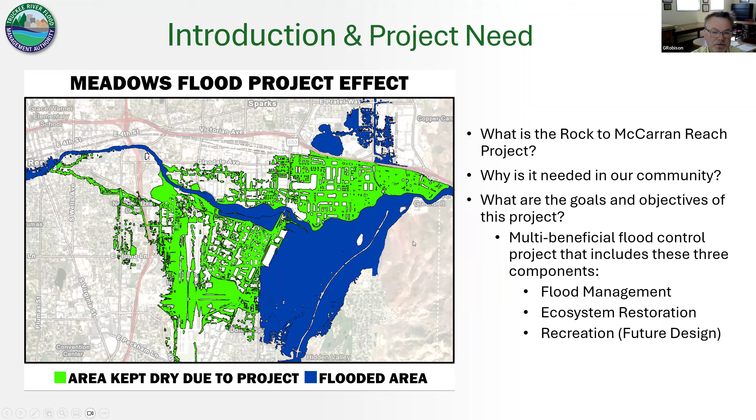Next slide, please. And I would probably hand this off to Shane at this point. So Shane, if you want to kind of go through this.

And then you can hand off to Wood Rogers for what we're going to do at the meeting. This isn't the actual talk, I'm just trying to bring it in because you guys know a lot of the information already, so I don't want to bore you to death. And for the working group, I'll just go through some of the background.

They haven't been involved with it, so I'll just say that we did an alternatives analysis in 2024. There were 8 alternatives studied in depth, and a preferred alternative was selected with proposed modifications to that preferred alternative. And then we were directed to proceed with the 30% design hydraulically on that.

And then we did have a working group meeting on 5/28 where we showed that preferred alternative, and I'm going to show that to you on these next slides just to get everybody on the same page.

And then we've also been preparing separately 2 concepts for this recreation, and we're going to share those concepts as well today.

So for the working group, most of them, if they went to the first one, will have seen this, but I'll just pull this up and say, here's really the preferred alternative for the hydraulics.

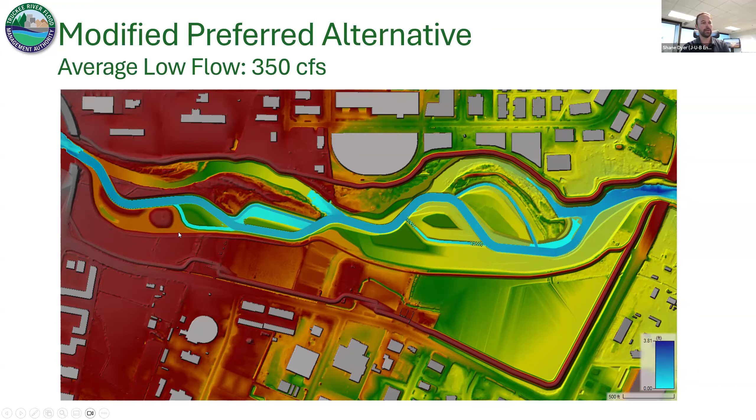And this is what the average low flow looks like for the 350 CFS. And we went into detail on this at our last working group meeting with all the different features, we really went through the design and all the features in here, and show this for the 5-year event, what it looks like. And then essentially for the 100-year event, what it looks like.

And then go into the recreation discussion overview. We're going to talk about some of the existing conditions, the criteria, and then the 2 concepts that we have, which are a nature park and then a nature park with a recreation complex.

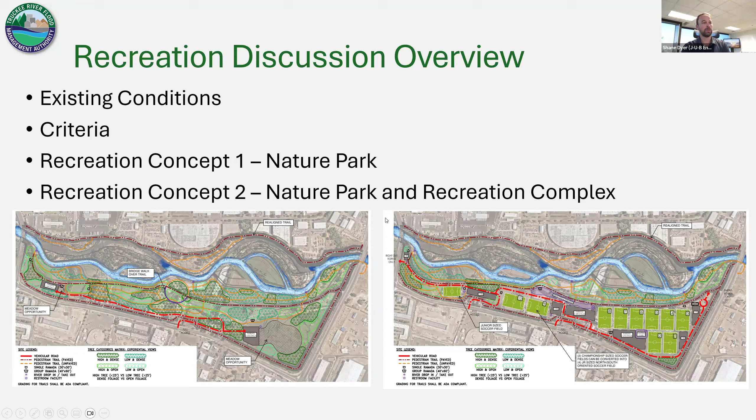So this is where I would turn it over to David. Yes, Shane, good morning. Morning. Good morning, everyone. My name is David Hewitt.

I'm a landscape architect with Wood Rogers here working on the project. The first thing that we wanted to do once we got the handoff from Shane after his introduction was to just talk about the existing conditions, tying in the colored red numbers to the location on the map here, just to kind of set the table for the conversation. Would you mind going to the next slide, please?

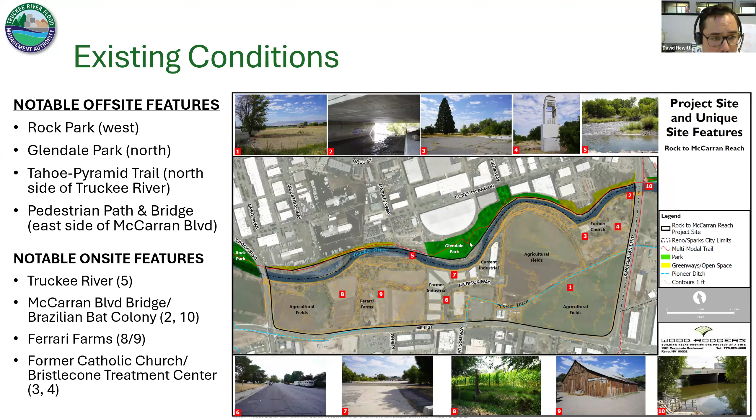This is a new slide that Eric, my planning cohort, put together to help people wrap their minds around the size of this park.

The project size for the Rock to McCarran Park project is 168 acres. For comparison, Oxbow Park is approximately 25 acres, Idlewild 50, Wingfield Bicentennial Park 9 acres. All of these other river-attached parks total approximately 157 acres. So even combining all existing recreational facilities along the Truckee River, it still doesn't match the immense project size of the Rock to McCarran project.

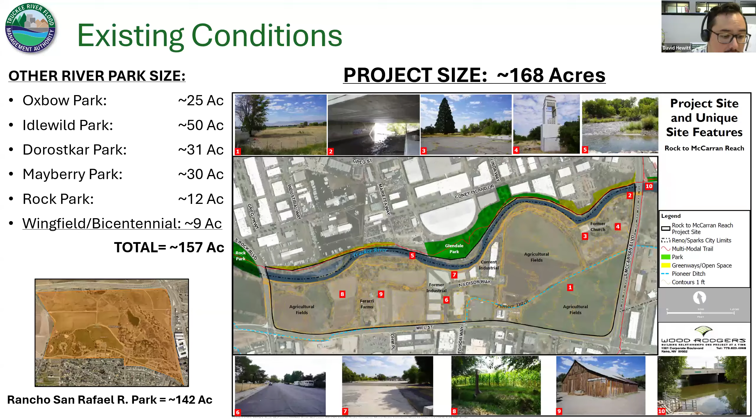Next slide, please. I feel so commanding when I say that.

Jumping into this next slide, we wanted to showcase the non-compatible amenities. As most of us know, the recreational part of the Rock to McCarran Park project is going to flood at some point. At the 100-year storm, the entirety of the park, all the way down to the roadway, is going to be flooded. So there are some clearly non-compatible amenities we don't want to put into this flood zone, like the sand volleyball pit.

Anything where a critical component of an amenity could potentially be washed away, we don't want to have there. That includes playground structures that require engineered wood fiber. That's an image of Idlewild Park there, which is on a rubberized surface.

These items will likely not be floodable, for lack of a better term. They could be inundated, could potentially have standing water, but there's going to be a myriad of maintenance concerns that spin off of a flood event. Hard courts like pickleball, and areas like skate parks that have a high installation cost but could be damaged during a storm event, we also want to stay away from.

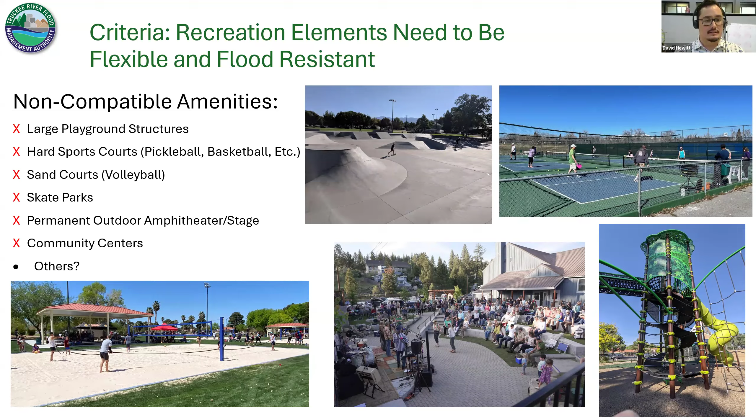Thank you. Jumping into our first concept here, we are titling this Nature Park because the goal is to create a recreational amenity that will service the community of Reno, Sparks, Washoe County, and the entire region of Northern Nevada, but to have as light a touch as possible. The main focus on the Nature Park concept will be an expansion of trails throughout here.

Around the middle point of the site, going from east to west, there is a burgundy-colored paved pedestrian trail along the top of an intermediary berm. Everything north of the berm in both concepts is staying pretty much the same. The braided river, the braiding of the Truckee River throughout here to increase flood zone capacity, is the critical component of the park. It's the entire reason why this whole project exists. That will not be changing in either concept 1 or concept 2.

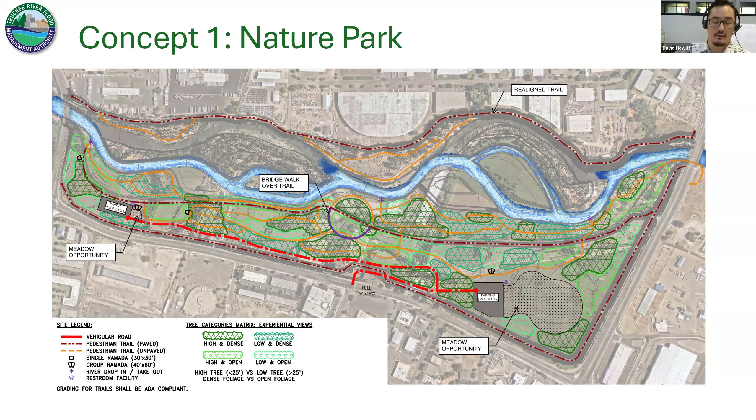Everything south of the berm is what we want to focus on here. As you can see, the primary amenities are expanded nature trails, meadow opportunities, and a bridge walk over the trail. If we jump to the next slide, it'll give us some concept imagery to help fill this out.

The purple half circle in the middle of the site is conceptualized as a bridge walk from the intermediate berm, connecting itself to the berm from there. What that does is it raises people and visitors above into the tree line so that they're above the paths below them.

We would also like to think about adding sheltered bird blinds onto this bridge walk, essentially a boardwalk connecting two parts of the intermediate berm, but bringing in sheltered bird blinds so that as you're among the trees, you can be hidden and observe the natural processes of the wildlife in the ecosystem here.

The grass and meadow plantings, those meadow opportunities, are areas set aside where we have some different ideas of what we could potentially put in there. One idea would be pollinator gardens, this could be a native meadow. Another idea would be to have turf in there for some kind of passive recreational element, where people could organize yoga circles, or there's even enough space for kids to have an impromptu game of soccer. Just some ideas we wanted to have in concept 1 for the nature park.

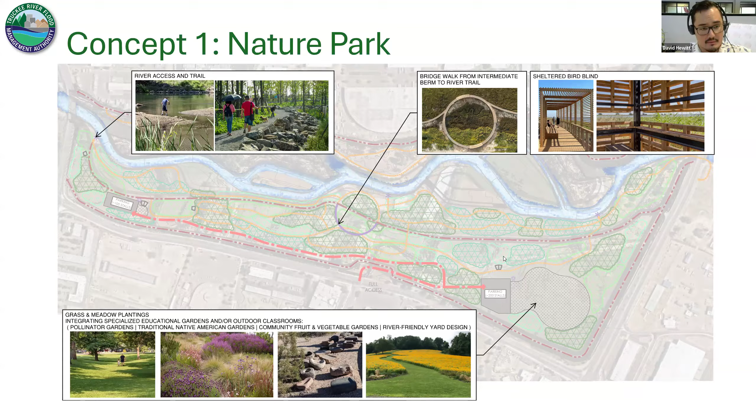If we jump into the next slide, we'll have some additional imagery for the nature park to talk about some of the other items we could have here. Nature walking trails is the big one, along with natural meadows, pollinator gardens, potentially art installations, picnic facilities, and river access. This is the core idea of the nature park, having as light a touch as possible and trying to enhance the ecological recreation that's available here.

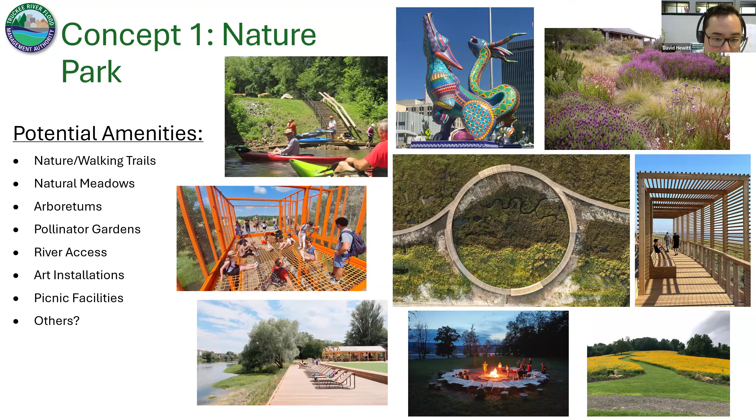If we jump into the next slide, we'll take a look at concept 2, which is a nature park and recreation complex. Everything north of that intermediary berm stays pretty much the same, with not much difference in the trail system or access points. However, south of that intermediate berm, we have a recreation complex trying to create a regional soccer complex facility.

This facility would be a destination location to host soccer tournaments for youth, young adult, and even competitive leagues. We're able to fit 10 full-size championship soccer fields within here, with 8 of them being the core soccer fields on the east side. In the middle, you'll see fields 9 and 10.

Those are oriented in a less... let me think of the best way to describe this. The preferred orientation for soccer and most sports is north-south, so the sun is always to the south. It's not the worst thing to rotate those, but north-south is preferred. So in the middle soccer fields of 9 and 10, we're able to fit 2 championship-size soccer fields, but they can also be converted into 4 junior-size north-south oriented fields.

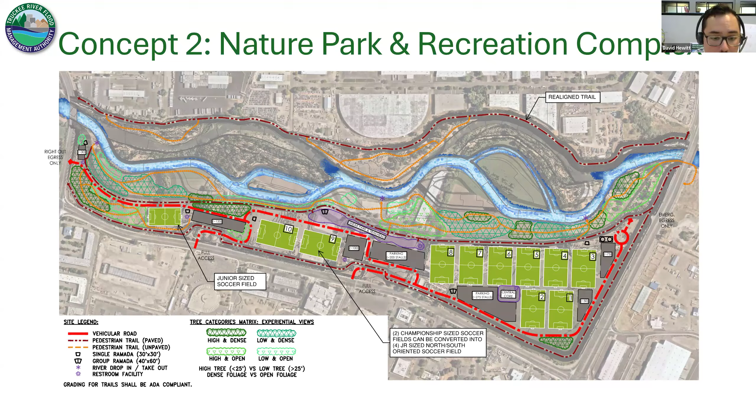So instead, it's essentially going to be a long area of turf, and multiple games and multiple uses for different ages can be implemented in that middle zone. We also had enough room for a junior-sized soccer field on the west of the site that you can see there. If we want to jump into the next slide, please.

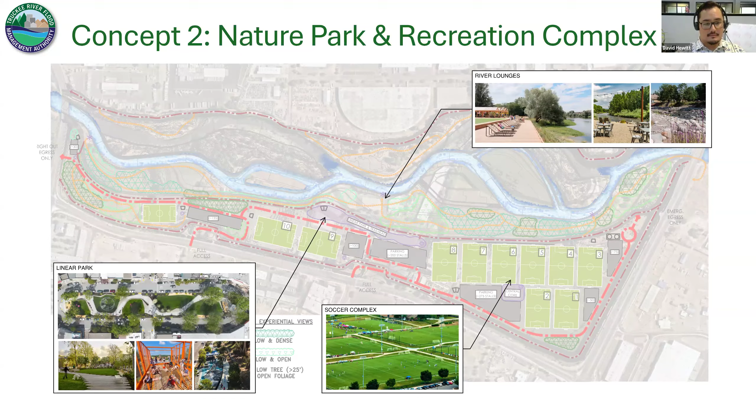Thank you. Oh, and we just, the previous one, there we go. Here are just some additional conceptual imageries. Oh, I lost my screen. I don't know if anyone can still hear me. We can. Oh, perfect, okay, it came back on. That was bizarre. All right, sorry about that.

So this is just additional conceptual imagery and some thoughts about what could happen at the Nature Park and Recreation Complex concept.

Where we're able to maybe think about having... let me step back for a moment. What we want to do with the Nature Park and Recreation Complex is serve as many people in the community as possible. We want to be able to serve the kids who are looking for a place to play soccer or go to a park.

We're looking to serve young adults who are also looking to do something a little more active and engaging outside of a typical park, like Idlewild, or even a more naturalized park like the Oxbow area. We have a few different ideas here on how to activate this site to serve the most number of people, as well as fulfilling the main goal of mitigating flood damage for when we inevitably have another severe flood along the Truckee River.

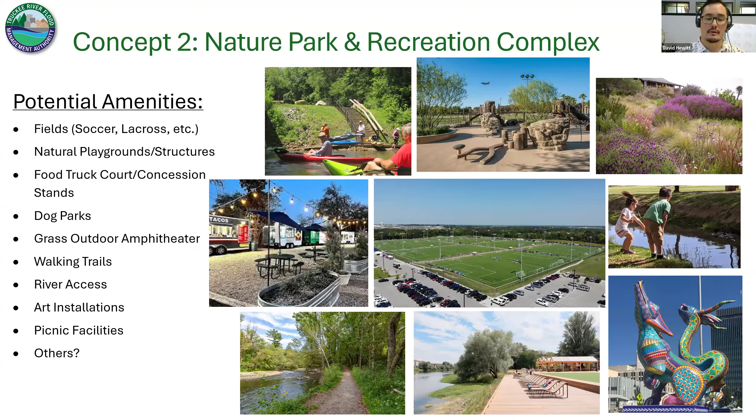And then we jump into the final slide of questions and comments.